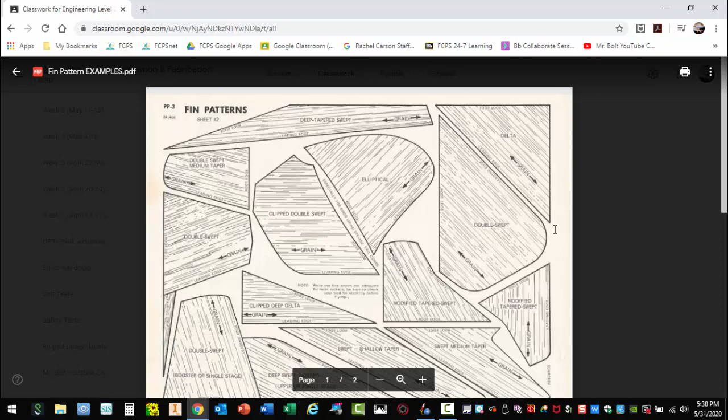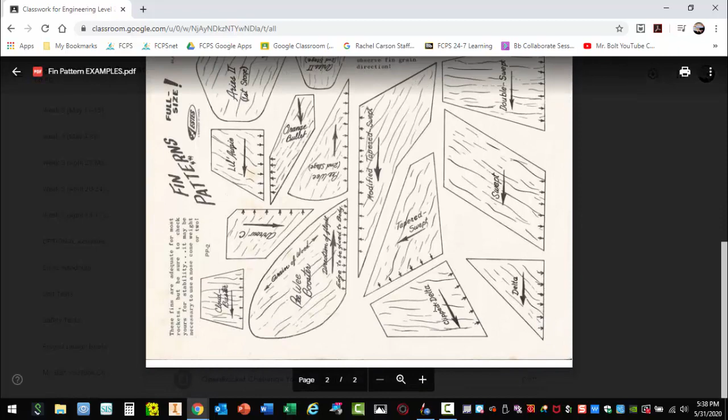Hopefully you've previewed this. What I'm showing you is 2 pages of proven fin designs. These have been used for decades and are very effective. Keep in mind that fins are designed for certain types of rockets, but there are a lot of good examples of fins that can be used. One I tend to use, a pretty reliable, sturdy, easy fin to make, is something like a double swept, this clipped delta. You have kind of this tapered swept currently on your Estes Alpha, and there's a few other options here.

Now, I want to zoom in to make sure you understand how to design one of these fins and know what edge is the root edge. Whenever you see these arrows pointing, in this case right here, that is the edge of the fin that gets attached to the tube. So this is the root edge. The arrow is pointing towards the front of the fin. This is the edge of the fin that makes direct contact with the air. And this right here is the back of the fin. So the root is this portion of the fin right here. This is a very important part when you're designing, to know what edge goes against the rocket.

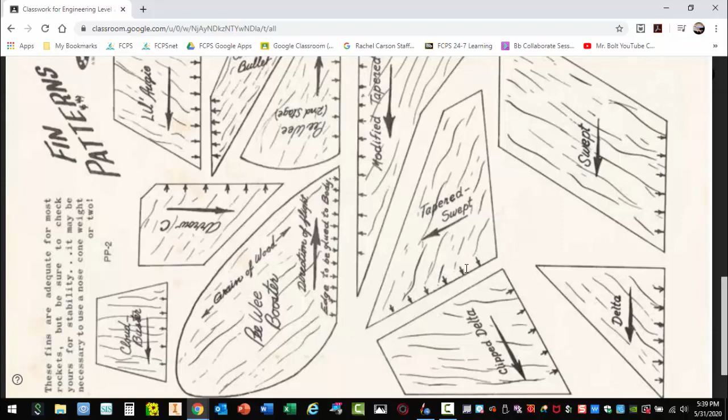Okay, so once again, we have 2 pages of proven fin designs, and the beauty of this project is you can get creative and make something original. So currently, we have a fin that is pretty much exactly like the Estes Alpha fin that you manufactured, or I should say sanded and attached to your rocket in level 1.

But let's now go over here to the left. You need to keep in mind that this fin is currently attached to the body tube. We have a second body tube. I'm going to go ahead and click on it. That is this portion of the rocket. This is where the altimeter is. Now, if you were to add a different type of fin, you need to first go back to body tube and make sure this body tube is selected. If you were to add a different type of fin, it would be attached then to this section, okay?

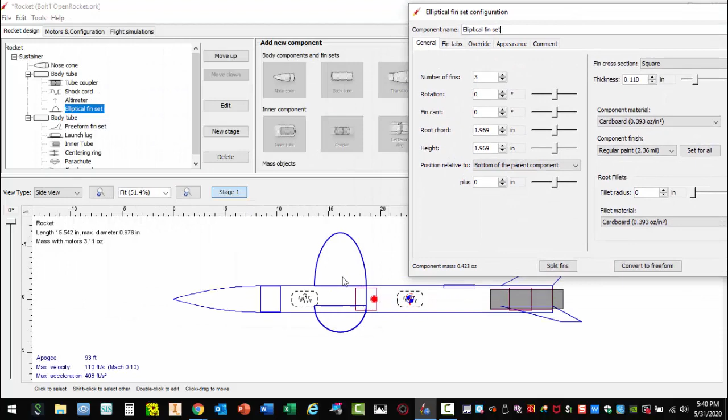Let me give you an example. Let me click here. If I were to say, oh, I'm just going to use a different fin, meaning I'm going to get rid of this and add a new fin set, if I were to select elliptical, you'll actually see the elliptical fins are attaching to the wrong part of the rocket. In my case, I wanted them to be attached here. Now, to get rid of a fin set, you can simply select it and hit delete.

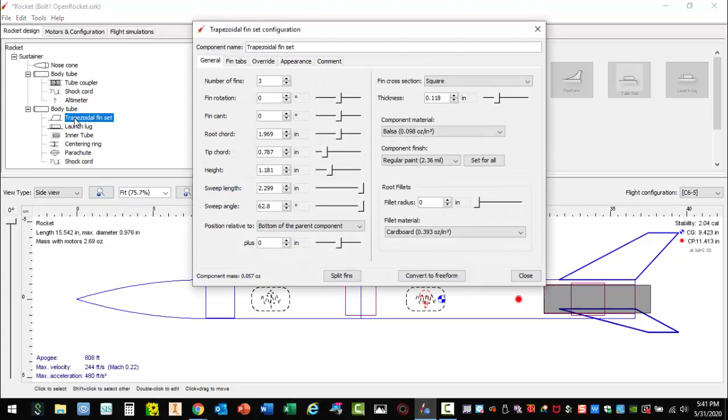But let's go back to the fins we originally put in, and I'm just going to double click on those fins. Keep in mind, these fins were called trapezoidal fin set. This is the fin you used from the tutorials. I'm going to double click here under body tube. This is the fin we originally put in. So here's what I like to do. I like to keep my eyes on the apogee and on the stability. Remember, we're looking for a number between 1 and 2, which gives us a stable rocket. It can be slightly above 2 or slightly under 1.

So just to show you a little bit of experimentation, we talked about how surface area plays a role in creating more or less drag and/or stability. So let's go from a 3-fin rocket. Let's make it a 4-fin. I'm just going to hit the up arrow. Let me go back down to 3. Okay, so we saw 2 things happen.

With an extra fin, here's 808. I'm going to add an extra fin. I go to 766. So I basically dropped over 40 feet because I added more drag, a little bit of mass, and in turn, less apogee. You'll also notice I'm becoming more stable. I went from 2.08 to 2.52. So adding that additional fin is going to improve stability, but your rocket will not go as high.

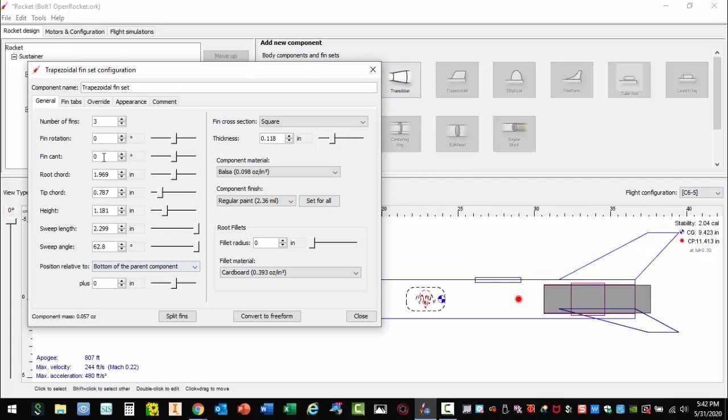So let's take this back down to a 3-fin rocket. I'm sorry, 2.04 was the original. And there's a few other things we can do here. We can change the chord. Now the root chord is once again the edge that gets attached to the tube. And if you click on this up and down arrow, just keep something in mind, you can type in something here. You can even slide this because they go in increments of an inch.

So you probably don't want to hit the up and down arrows so much as you probably want to type in a number. What we originally had was something probably around 1 point something. Let's go up to about 3. Let's just experiment here. Remember, I can just highlight this and type in a number like 3.

Okay. Now, you'll see that I'm at 790. I've actually become less stable. Interesting. Okay, it's less stable. I did make the root longer. I still have a 3-fin rocket. I'm going to go ahead and hit close. And that's the only thing I'm going to do right now, just to show you how the progression works. Whenever you make a modification, hit close.

Now, if you realize, oops, I wish I had not done that, you can actually hit Control Z right now. Watch this, Control Z. It actually brings you back, even though you had closed the window first. I'm going to hit Control Y. Let's bring that fin back. So Control Z can still be applied if you made a mistake and want to go back to your original fin design.

Let's go back to flight simulation. Remember, whenever you make changes, we click on the simulation. Let's do a C6-5 simulation. I hit Run Simulation. Okay, and this is nice. You kind of get a preview of what it thinks you're going to get: 783. This is kind of a ballpark number here. And I'm also getting a flight time of 63.2 seconds.

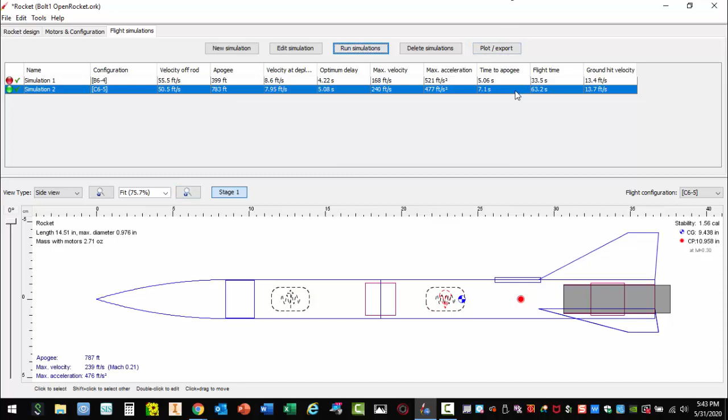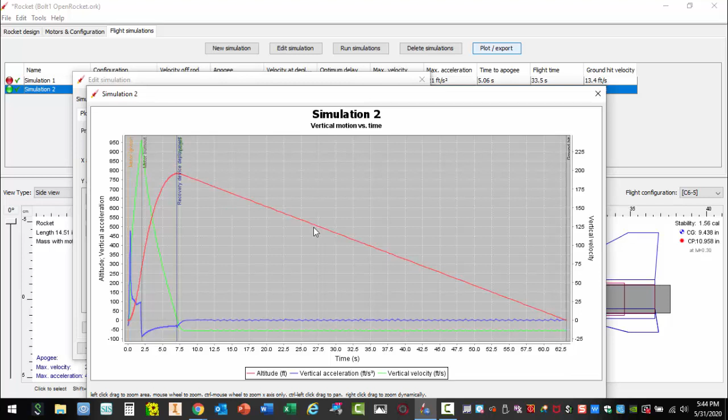We're going to hit Plot Export. I'm going to hit Plot again. We talked about this in the previous video. It looks like my recovery and my apogee are almost neck and neck, which is good. Once again, this rocket's now hitting just under 800 feet. I made it a larger fin, which in turn brought it down a little bit, and a flight time of just over 62.5 seconds, okay?

So we can, once again, go back to rocket design. We can double click on trapezoidal fin set, and we can start manipulating these numbers here. Obviously, I can change the height, okay? But once again, you're probably better off using the slider here to make some of these manipulations. The sweep angle is that back angle, as you can see right there.

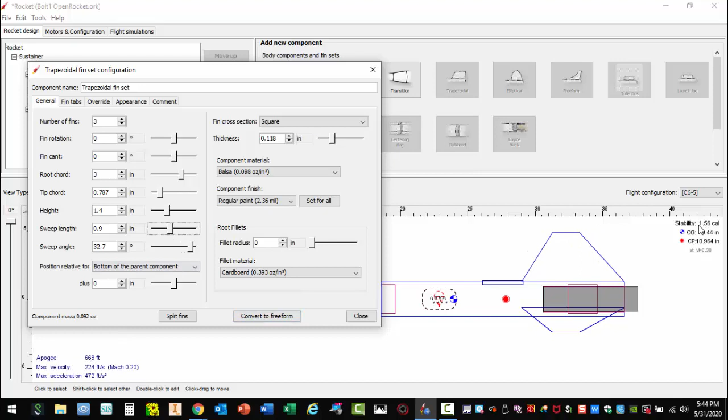And the beauty is, as you make these adjustments and then you stop, you can see what's happening. Make the adjustment, stop, and see what happens. So this is the beauty of simulation software. You're getting real-time feedback of what is happening as you change the size and shape of your fin.

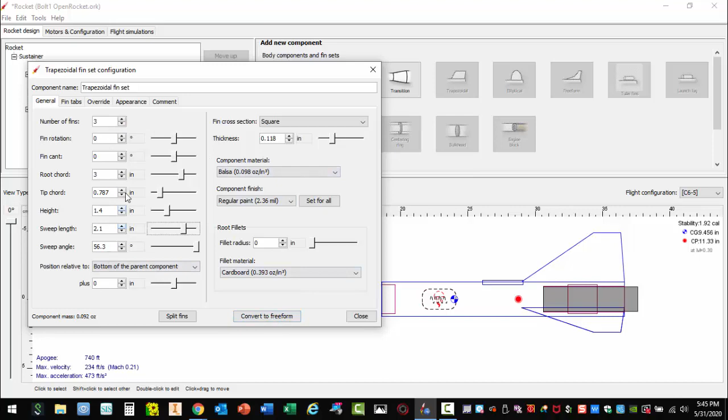Now, there's a nice little option here. It's called Convert to Freeform. I'm going to go ahead and click on this Convert to Freeform. So I'm going from just using a lot of sliders to actually manipulating points. Watch this. I'm going to hit Convert to Freeform.

Now I want to select this option called Shape. Okay, and once again, I like to keep this fin design rather large so I can see what I'm doing. But at the same time, I want to be able to see this, and I want to be able to see this. This right now is a stable rocket.

It's between 1 and 2, what's called cal. 1 cal is 1 body tube diameter between CP and CG. 2 cal would be 2 body diameters. And by the way, we have a body diameter of about 1 inch. So 1 cal is about 1 inch between the CP and CG. 2 cal would be about 2 inches between CP and CG. So you can see I'm just about there, just under a 2-inch gap.

Now, here's what this freeform does. This is super cool. I can click and drag, and you can see now the image change. Okay, and you have some options here. You got to look at these options. Click, plus, drag, add, and move points. Watch this. I'm just going to click. Okay, I can add points, click, add points, click, add points. So I can start to change the shape of the fin.

Okay. Now, I'm going to pause right here, and here's a very important thing to remember about simulation software. Look in this bottom right-hand corner. Jagged edged fin predictions may be inaccurate. Actually, that's a great little warning there, but it goes more than that. Simulation software is simulation software.

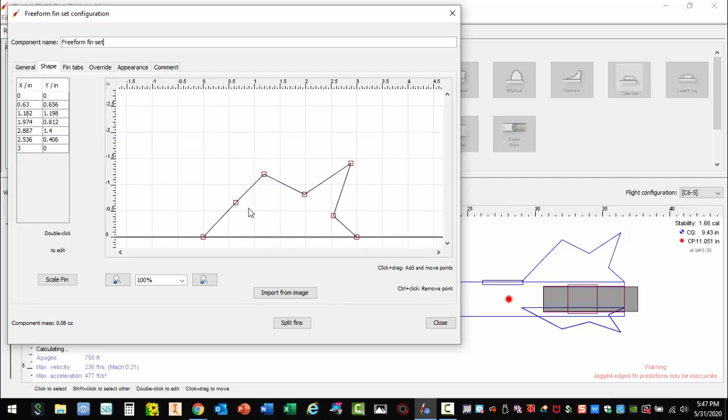Now, to get rid of some of these points, I have to hit my Control key. And if you're on a Mac, that's a different key. I don't know off the top of my head. That's the Apple key for the Control key, okay? And I can get rid of these points. So I'm holding down the Control key. Now I'm going to let go. And once again, I can go ahead and start shaping the fin. So Freeform, I have a feeling, is going to be a very popular feature that many students are going to use.

Now, a few things to remember. I want you to look at this graph. 0 is here. 3 is here. My root is currently 3 inches long. Let me take this down to about 1.5 inches. I would not make this root probably less than 1.5 inches, because you're going to start to get a fin that may not have much stability, meaning it's going to be maybe moving during flight.

Okay, now once again, look at my cal as I move my fin. You can see the cal is still stable. Okay, it's starting to become a little bit unstable. So interesting things happen as you make the root edge shorter and longer. Now, look at my cal right now. This is telling me that this is obviously extremely unstable because the fin here needs to have the support, and the support you get is where the fin meets the tube. There's got to be some material here to keep it from moving, flexing, bending, turning, twisting while it's in flight.

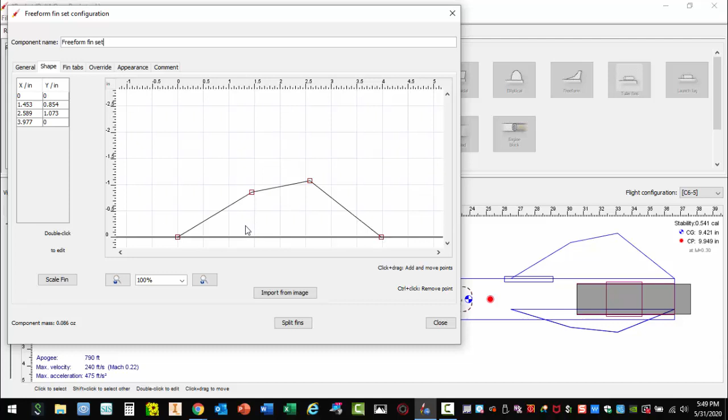So I would recommend from here, 0 to here, 1.5. I would try to keep this at least 1.5 inches. Now, obviously, be careful on the root being much longer. And I usually tell kids, you know, this is a fairly small rocket. I don't see a student having to make a fin longer than 4 inches. So between 1.5 and 4 for the root is probably a good number.

This right here, the height, I would say the highest point should be at least 1 inch tall. Here everything is below 1. You can clearly see these are all below 1. At least something needs to be hitting at least 1 inch. The problem with a fin like this is you're not really creating a fin for its intended purpose. A fin is to add stability, and you really don't have much material here to give the rocket the stability it needs with this fin design.

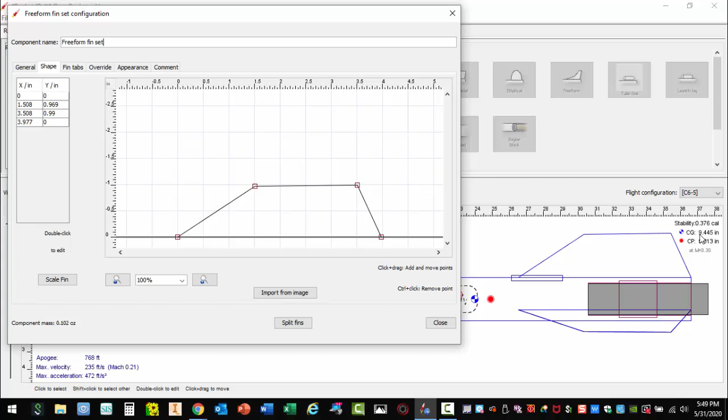So we need more surface area. We're going back to that term again, surface area. Okay, so the more surface area, the better. Now remember, look at my cal. This is a very, very unstable fin. So once again, I can start to add some more surface area. Okay, that's much better. I can even bring the root edge in. That's a little bit better.

Okay, and you can now see, just the beauty about this program is that as I move these points, I'm kind of getting some instant feedback. And I kind of bring this almost back to its original shape, just close to it. Oops, I think I just made an extra point there. Control click, there we go. So I'm going to kind of bring this back to its original shape.

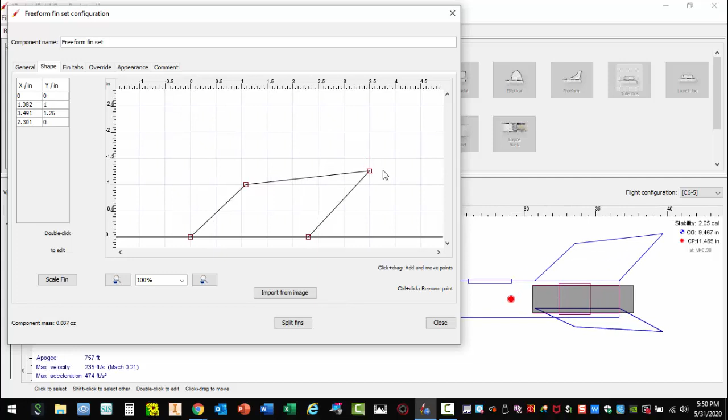Now remember, if I really screwed this up, I could hit close. Okay, it's going to show my current fin design. Then I could hit Control Z. I could hit Control Z again. Okay, and look at that. Control Z works in this program. You can go back multiple steps to go back to a step where you want to start off with.

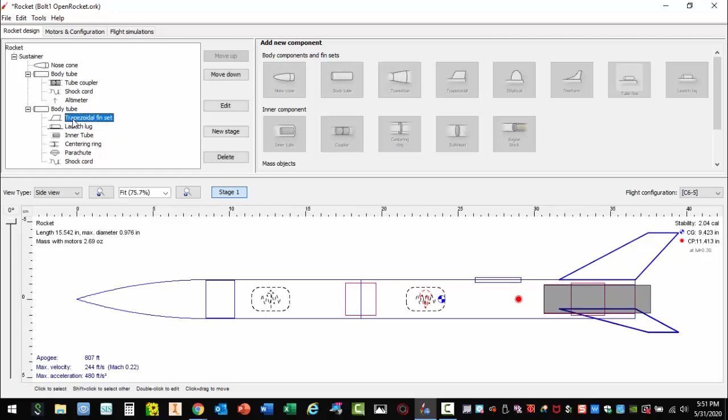Now, I will leave you with one last thing. If you're not interested in a trapezoidal fin set, which can also be converted to Freeform, here's what you need to remember. You need to click on the set you don't want. I'm going to click on the set and hit delete. Now keep in mind, I have a rocket with no fins. Look at my stability, -7. Okay, to add a new fin set, click on this body tube, please.

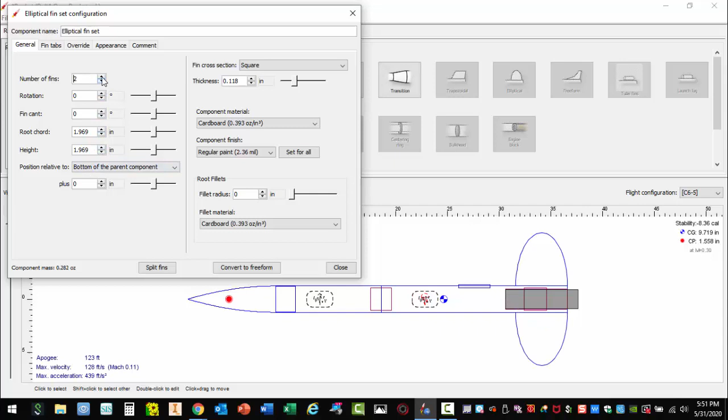Okay, and there might be students that want to use elliptical. And you can even start off Freeform. Let's just say I hit elliptical. So once again, the elliptical fins are going on the correct body tube. Here also you can start manipulating from a 3 fin to a 4 fin. Remember, we're making 3 or 4 fins. You can see the apogee here changes from a 3 to a 4 fin rocket.

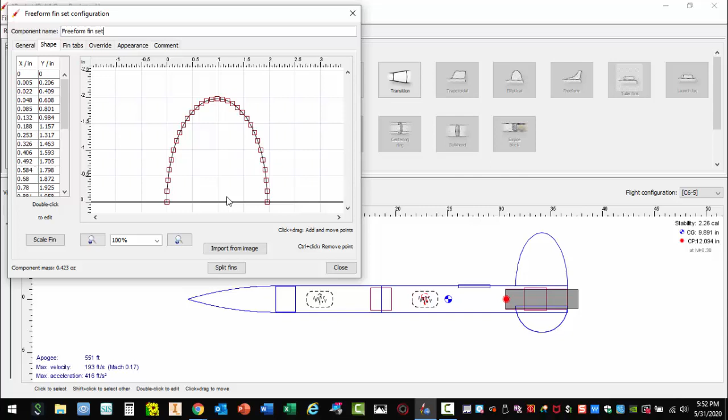We can change the root chord, you can change the height, and once again, you can go back to convert to Freeform. You can go to shape. Careful with elliptical, because as you start to move some of these points, it could get a little complicated. So elliptical might be something a little bit more involved to change the shape, but there are obviously some features like scale fin, where you can actually scale this fin down.

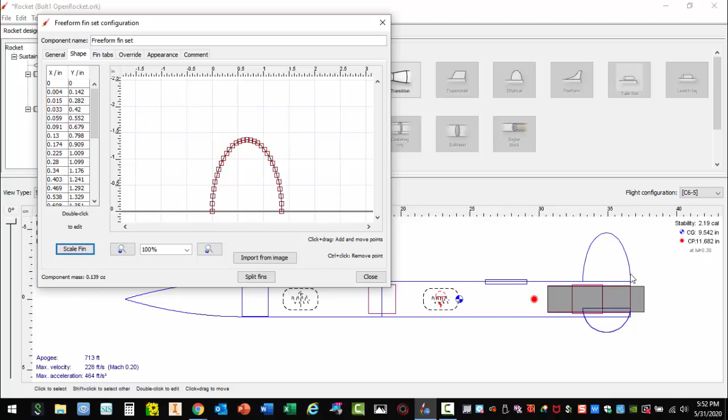Let's see if I can do this here. Okay, let's go scale it to a smaller number. I'm going to hit scale. Okay, it actually reduced it down to 70% of the original size. So it's got some cool features here, and things that I want you to experiment with. All right, so I'm going to hit close.

And once again, every time you make an adjustment, you have a preview here, but really you need to go back to flight simulation. Let's use a B6-4 this time. You're going to hit run simulation. You see the little green circle? That means we have a fresh run of a simulation. Plot / export if you want to, or simply read the data.

This is hitting 358 feet. It has a flight time of 30. Okay, so we can see a substantial difference between the B and let's run the C engine. Run simulation and a C. Okay, definitely a difference because you're going higher, which means it's going to take longer for the rocket then to come down. Okay, so we're going to stop this video.

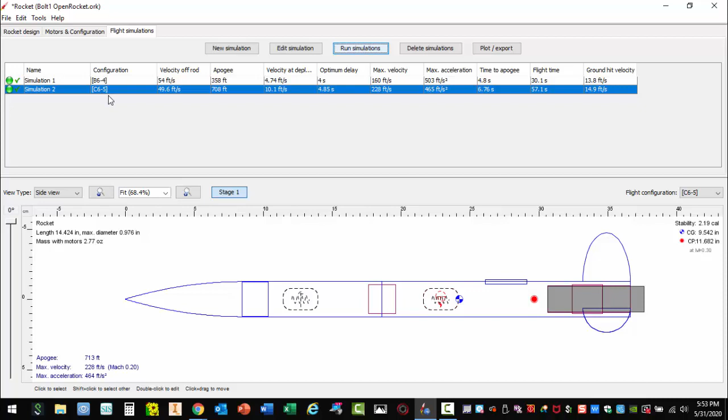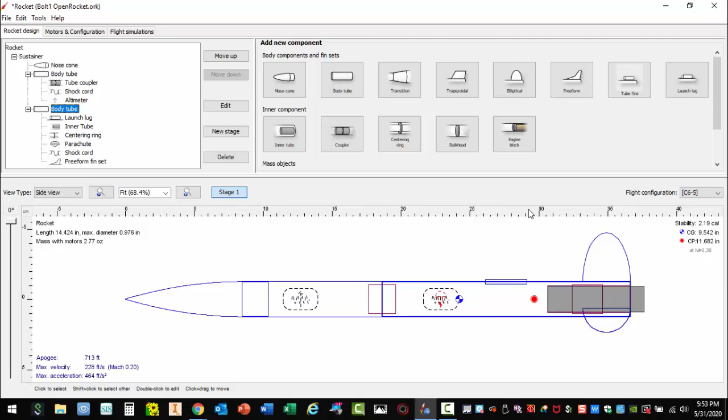We've shown you how to manipulate either a freeform fin, taking the original trapezoidal fin and converting it to freeform, or adding an elliptical. But once again, folks, make sure you select the right body tube when you're adding your fins. And remember, Control Z can be used if you make any mistakes and need to go back. Okay, we're going to go ahead and jump into the next video.